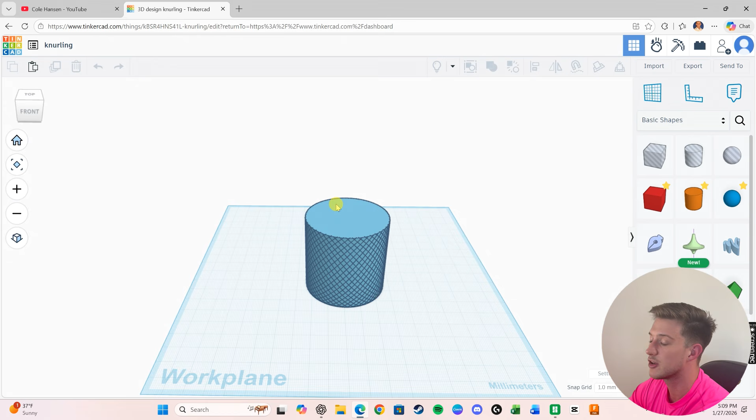Go ahead now and create your very own design. I'm going to hop over here into my pre-made knurling design. And if you think this is pretty simple and easy because we have a cylinder, trust me, it is. And I promise you it works for any 3D solid design that you have. All you gotta do is follow these simple steps.

So I'm gonna go ahead and slide my cylinder over here. I'm gonna bring a new one onto my work plane and make it 60 by 60, and then make it 60 tall. From here, all we're gonna do is increase all the sides so it's nice and smooth.

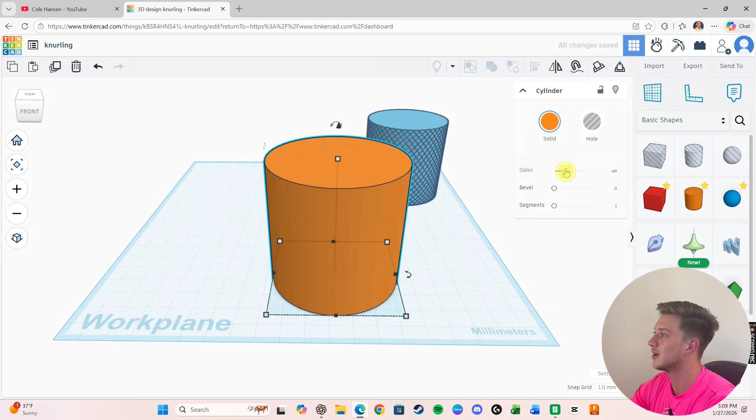And the last thing we need is a square. We're gonna make our square 80 millimeters wide by 0.5 millimeters long, and then we're gonna make this crazy tall, like 120 tall. Reason why is because we want it to completely cover the entire center of our cylinder.

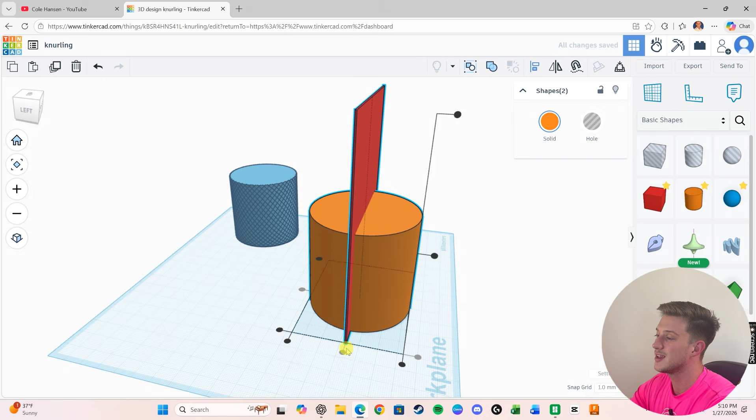We're gonna align everything by highlighting it, clicking the L button on our keyboard, and aligning it length, width, and height-wise. Now what we're gonna do is re-click on our little square, our little plate, and we're gonna rotate it.

We're gonna rotate it at the top first. Not to 45 degrees, but somewhere inside it. So I'm just gonna go, let's go 38 degrees right there. That seems just about perfect.

And then what we're gonna do is rotate it at the bottom. We're gonna click Control D, rotate it. I would say probably, let's go 10 degrees. I wanna see what that looks like. So we're gonna go 10 degrees and see what kind of knurling that creates.

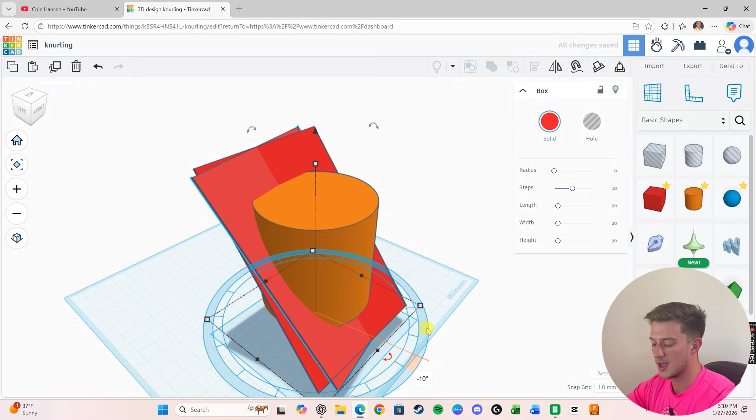Now I'm just gonna click Control D, and notice, it rotates it another 10 degrees for our new plane. I'm gonna go all the way around and hold that Control D down until I get right back to where I started from. Boom, perfect.

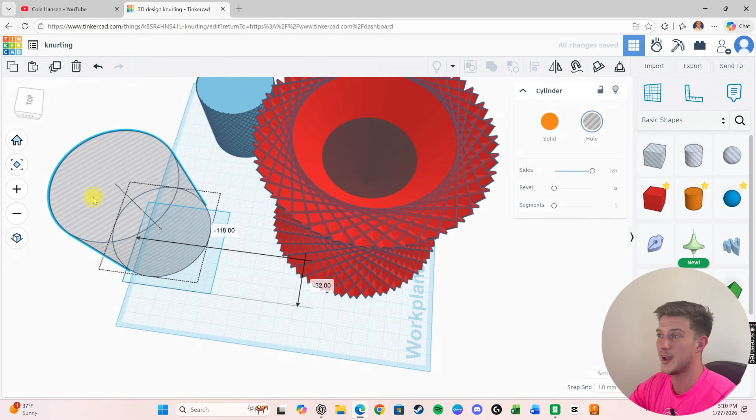Now that it's been completely covered, all I'm gonna do now is turn my original cylinder into a hole, click Control D so I can duplicate it and drag the original one over, and then group everything together, Control G, and wait. Sometimes this takes a long time, sometimes it's rather fast. It just depends on how much Tinkercad needs to process.

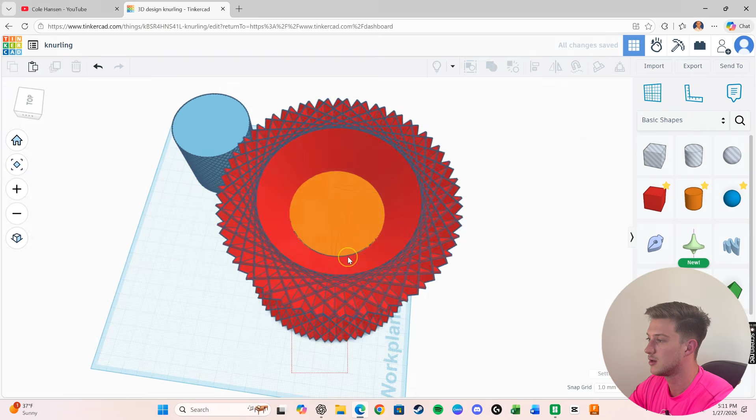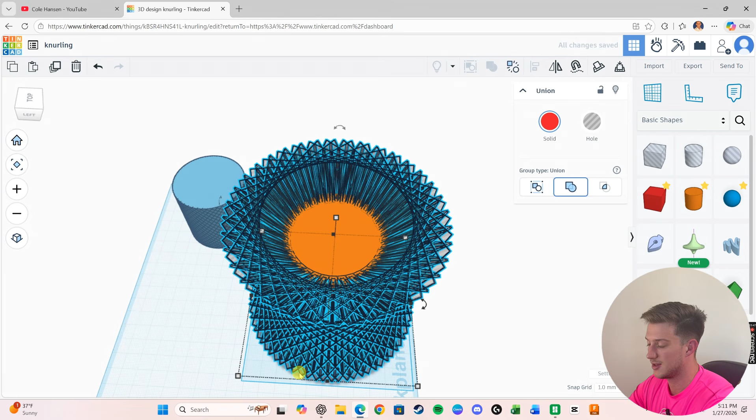Now I'm gonna turn my original hole cylinder back to a solid. I'm gonna line everything back up, L to align its center here, align its center there, and align its center there. And then now what we're gonna do is just take our original cylinder and make it 61 wide and 61 long. Line it all up again. Boom, boom. And then from there, all we need to do is turn our lattice into a hole and then group it all together. Boom, Control G.

And with that, guys, you have a perfectly formed knurling. Now, all you need to know is the difference in size that you make your plate, and the angle that you turn it at, is going to change the size and shape of your knurling, whether you need it tighter or wider or rougher. You can make that cylinder just a little bit bigger so it cuts even deeper. But with that, that is the easiest, simplest, and fastest way you can create knurling with Tinkercad.